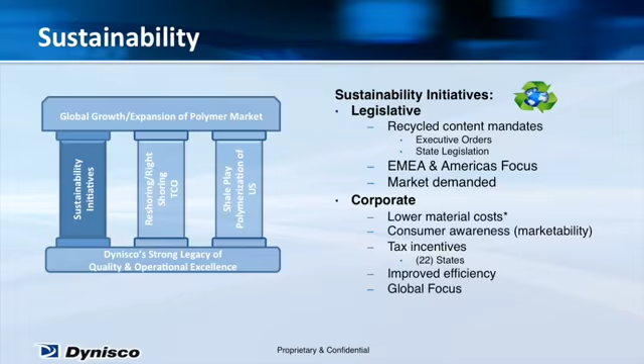The second pillar impacting the increase in polymer production and conversion revolves around what we call today reshoring. Some people call it right shoring. Others call it regional manufacturing and distribution. Here at Dynisco, we have a strategy of build where you sell. By doing that, we minimize risk factors in the total cost of ownership while providing the quickest deliveries to our customers. Simply put, American corporations' love affair with chasing low-cost geography labor has been challenged lately by the actual results it has been receiving from that strategy.

More and more companies are deciding to follow Dynisco's lead and build inside of the geography of demand. For today's discussion, that's North America, and with work returning to a quote-unquote higher labor rate geography in relation to Asia, productivity and quality become paramount. We simply cannot afford to make mistakes, driving the need for better sensing and rheological solutions.

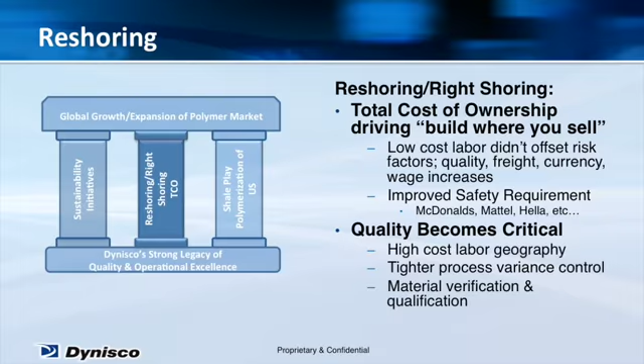The third and the largest impact on polymer production for North America is the shale play. North America is moving from the highest cost producer of resins to the lowest cost producer of resin. Why? Because the two largest cost components of resin production are the feedstock and the energy to convert that feedstock, both of which are converting over to natural gas extracted from the shale fields.

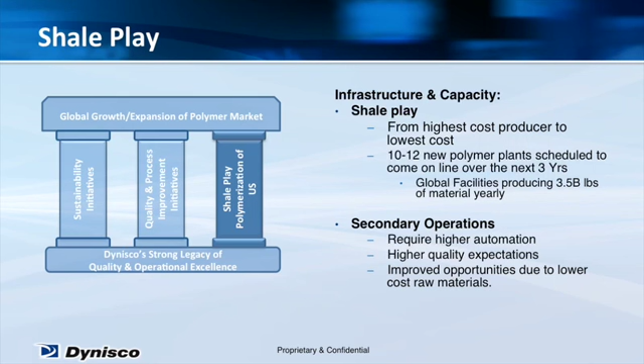The next highest cost component of structure is transportation, so we envision a good portion of the polymer produced will be diverted to local secondary operations, whether it be compounding, injection molding, extrusion, film, or thermoforming. All will require an understanding of the rheological properties of the materials you are working with.

As you look at the graph from the American Chemistry Council, you can see the almost parabolic growth of the plastics market space in North America. What I can tell you today is that it is beginning to happen, although it has shifted 18 months, so we're effectively sitting at the beginning of 2015.

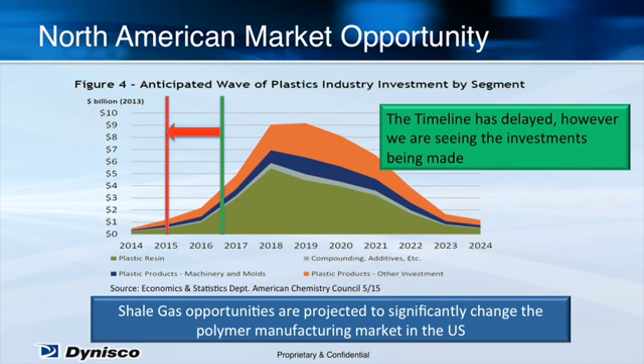This is mainly due to the dramatic oil and gas price drops, leading to a slowdown in capital outlays. The takeaway is that your company will be impacted by the polymerization of the U.S. as the available markets for plastics increase tenfold over the next 3 years.

As we look at the almost $50 billion market opportunity developing over the next 5 years, the need for the associated rheological equipment will scale accordingly.

This includes the verification of inbound materials against specifications such as melt flow index, melt flow rate, and viscosity. As materials are compounded and converted into secondary forms, more testing will be required to ensure master batching and physical end-state properties, driving higher quality levels and limiting liability exposure for the plastics converters.

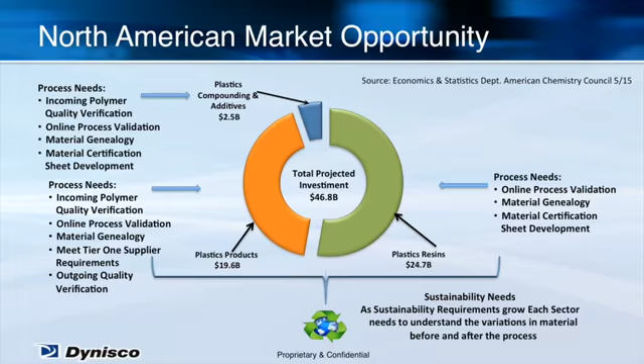As you've seen, the shale play will have a major impact on how polymer is produced in North America. Understand that these same techniques will eventually be utilized in a rinse and repeat manner across the rest of the world. Now that you've heard about the market dynamics, I'm going to pass you off to Bill DeRoges.

He will explain how our portfolio of instruments can provide you a window into your polymer process. Thank you, and I look forward to your questions.

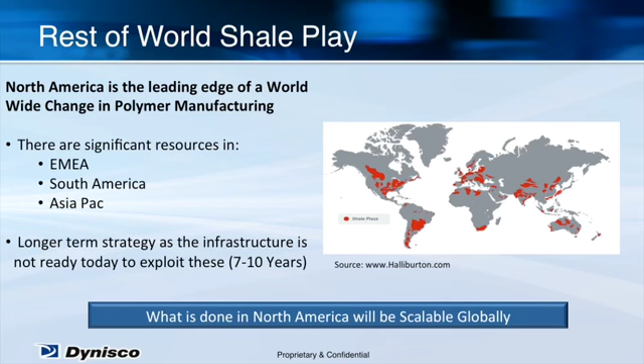Thank you, John. In the next section, we are going to focus on a few important topics: why do we need to test polymers, at what points in the process do we need to test the polymers, what are the benefits in each step, and how do we correlate lab information with production.

The data generated with this instrument is the benchmark for evaluating polymers in the academic world as well as in production environments.

Next in line, we have the LMI Melt Flow Indexer or Plastometer. This is used for quality control and verification of polymers to the ASTM and ISO standards.

Next we have the LME, TUS, and LEC. This is Dynisco's small extrusion compounding line that's used for making small batch developments of polymers.

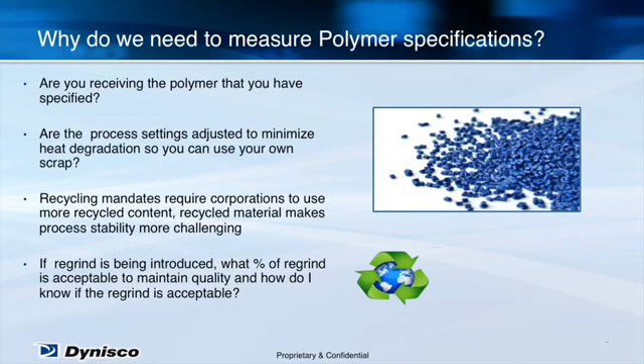If you can perform a simple analysis, you can dial in the proper blend ratio at the time of production to ensure quality and maximize profits per part.

Validating material at receipt in your plant. Many processors receive material in different ways. Some receive bulk material in rail cars or via trucks. Others order material in 25-kilogram bags. Regardless of how you receive the material, you will be mixing it or storing it with material previously received.

An example of this is in a silo. Many processors will fill a silo when it reaches a certain percentage of fill, just like in your car, you never wait for your gas tank to be empty before filling it up. What this means is your new batch of material being received is going to mix with 10 to 25% of material you already have in your system.

If you find after the polymer is being used there are problems, as a processor, you will have a tough time explaining this to the resin distributor that the material was not contaminated in your silo or in your storage bins.

With bags, it's easier to identify the rheological data of the individual bags, but globally, with the bag break systems being employed, you empty dozens of bags at one time or a full pallet of material. If you do this, you'll have the same problem mixing material in your material handling lines or in your day bins. A quick 15-minute test with a melt flow indexer while the material is being prepared to unload will eliminate this issue.

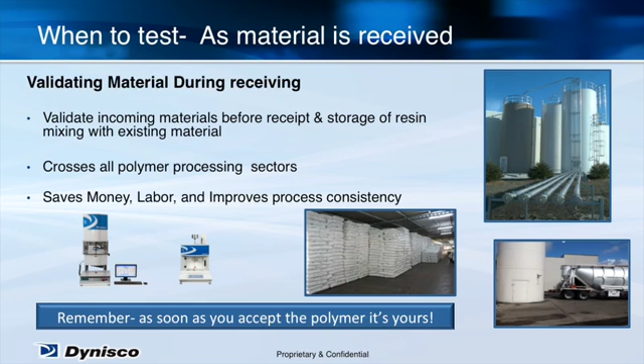When testing, it is also best to take a few samples from the top, bottom, and mid of a truck or a rail car. A few minutes of labor spent here will improve process consistency and save labor trying to identify issues down the line, or worse, reverse engineer failures in the field and the quality costs associated with that.

Much like testing material before you receive it, within your plant you may contaminate lots before molding or extrusion. Within your process, it is important to select and test samples of your material at various stages so you can understand if at any point your process is having an adverse effect on your material.

It also allows you to create a rheological benchmark of custom blended materials. Many times, this is what makes your product unique. By understanding this data, you can measure the properties and maintain process consistency from lot to lot. Measuring this data will also help when designing mold simulation models for your parts.

In this situation, you will have a lot of material being recycled over and over again. It is critical for the customer to understand if the process settings are appropriate so he can maintain this cycle of reusing the polymer. The molder is already granulating the runners, so taking a small sample and running it through a melt flow indexer will give valuable data to help the processor make adjustments or decisions on regrind usage.

Of course, by understanding the regrind being used at a specific time, you'll be able to adjust your blender percentage accordingly from each gaylord being supplied.

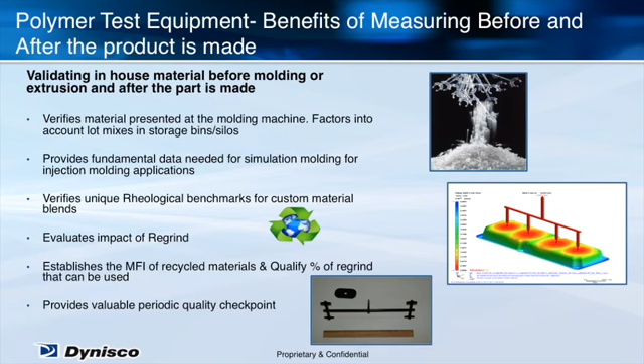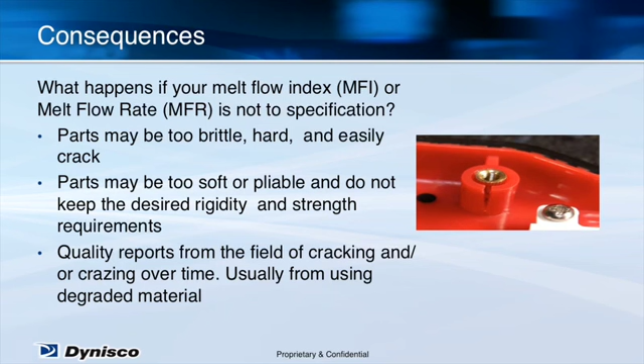You also may hear well after the shipment of quality issues in the field which could lead to warranty claims or lost customers. Take the opportunity to differentiate yourself from other producers of similar products. Understand your material as you're processing it.

Online rheometers are excellent ways to take information used in lab environments and correlate them with production situations. Dynisco's online rheometers provide a continuous, real-time window into the process by measuring up to 15 different pieces of rheological information.

These include melt flow index and ratio, intrinsic, relative, and melt viscosity, shear rate, shear stress, and shear sweep. These instruments reproduce data obtained from a melt flow indexer and a capillary rheometer in the laboratory and continuously monitor them within your production process.

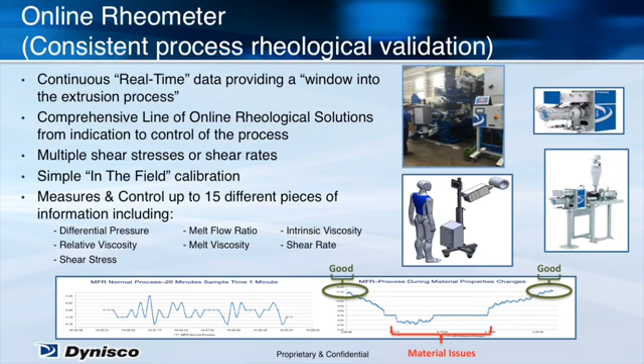As you can see from this slide, Dynisco offers a full range of online rheometers to fit specific applications, from our ViscoIndicator, which indicates only the rheological data that your process has, to our Visco sensor and CMR4s, which do full indication and control of the rheological data. The Rex option provides the process the ability to take pellets, re-extrude them, and then measure the rheological data.

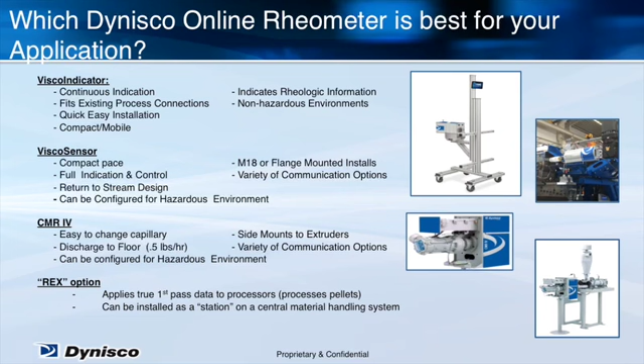The last topic I would like to talk about is how melt flow indexers and online rheometers can assist post-industrial recyclers. Recyclers have the task of procuring post-industrial scrap from processors, size reducing it, and finding customers for the reprocessed material. Polymer analysis in these environments is extremely important so that recyclers can make smart purchases on the incoming material and get the most money per pound when they sell it.

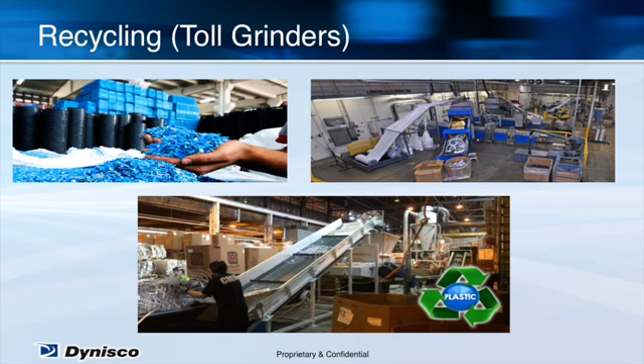In a market where small change in price per pound can make a significant impact to profitability, a simple tool like a melt flow indexer can pay for itself in a matter of weeks. Understanding the rheological properties of the material can contribute to the profitability of a recycling operation.

Typically, a recycler will purchase large batches of material that will allow them to process the same scrap over time, minimizing the changeover and cleaning time between materials. If a recycler understands what they are purchasing in advance, it will allow them to find a buyer for the material after it's recycled, or even make sure the material is not degraded to the point where it's not usable before they purchase it. Many recyclers have bought material and then are burdened with it, unable to find a buyer.

The post-sale benefit lies in the concept of certified material. Some recyclers have moved to the point where they supply their own material data sheets on the material they have reprocessed. By providing material certifications, it significantly improves their ability to sell the material to a wider audience. With a small investment, a recycler will be able to provide the end user with data of what they're buying, giving them additional confidence and making sure they may have made a sound business decision.

Next, you'll hear from John Cazzati, Dynisco's Director of Engineering. He will go into the technical details of Dynisco's online rheometers, especially the new ViscoIndicator, which will help bring online rheology to all processors.

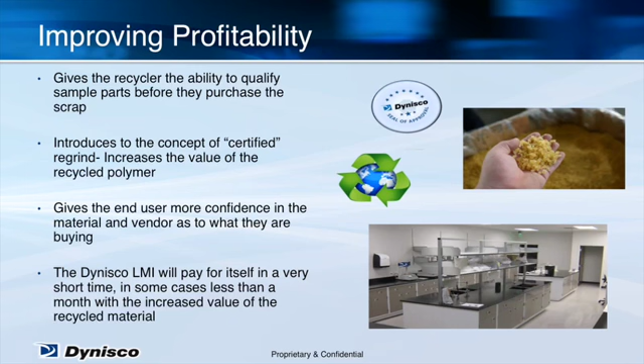My goal is to explain how the ViscoIndicator Online Rheometer duplicates the test conditions of a laboratory melt flow index tester or capillary rheometer. Melt viscosity measurements, such as the melt flow index or MFI, are primary specifications of thermoplastic resins. MFI and melt viscosity are related to polymer molecular properties, so these numbers give some measure of the physical properties of their product as well as the polymer processability.

MFI is a measure of the ease of flow of the melt of a thermoplastic polymer. It is defined as the mass of the polymer in grams extruded in 10 minutes using a specified test method such as ASTM D1238 or ISO 1133.

In the method, polymer is heated to a defined temperature. Then it is driven through a capillary with a defined diameter and length by pressure created by loading a piston with a defined weight. The pressure in psi would be the pounds of the test load divided by the area of the piston in square inches.

The weight of the material driven out of the capillary by that pressure in 10 minutes is that material's melt flow index, or MFI. The melt flow index test is a very simple and effective way to check material viscosity.

Because of the short capillary L over D, this rheometer measures not only viscous losses in the capillary, but also viscoelastic losses in the capillary entrance. This means that the measurement is a function of both the rheometer geometry as well as the polymer viscosity. In other words, the ASTM D1238 standard defines both the apparatus and the polymer test conditions.

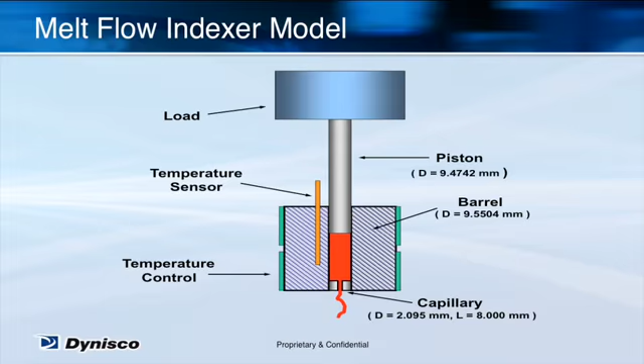Melt flow indexers must be hand-loaded with pellets and weights to create shear conditions, so the test requires a technician and must be done offline.

The ViscoIndicator simulates both the apparatus and test conditions of the MFI test right on an extruder. In the model shown here, a side stream is taken from the extruder, as indicated by the red text in the top center. Process pressure from the extruder forces polymer melt into a metering gear pump.

The pump generates the flow rate and pressure to extrude the polymer through a capillary. The temperature of the steel around the capillary and pump is controlled. A single pressure transducer is located above the capillary to measure driving pressure. The test polymer extrudes to atmosphere, meaning it falls to the floor, just like it would in a melt flow indexer. All material that enters the rheometer flows out as scrap, typically at a rate of half a kilogram per hour.

This rheometer duplicates the internal geometry of the melt flow indexer, so the capillary entrance effects are similar.

In the ASTM mode of operation, the pressure defined by the load and piston specified in the ASTM method is recreated by controlling the gear pump flow rate using data from a pressure transducer. The material flow rate is calculated from the speed of the gear pump. Remember, a gear pump is essentially a positive displacement device that pumps the melt at a constant rate regardless of the resistance to flow.

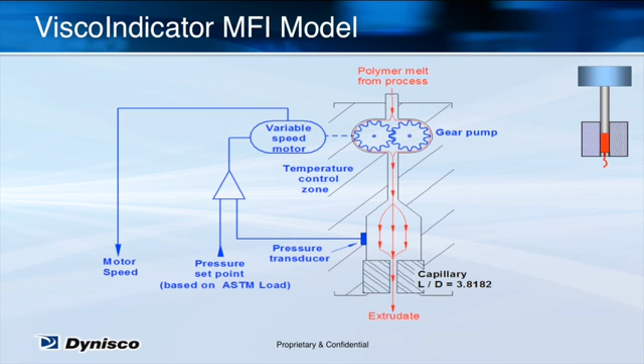This is how a ViscoIndicator duplicates the test result from a melt flow indexer right at the extruder without needing a technician.

The ViscoIndicator has a Windows 10 IoT, or Internet of Things, based rheological software platform that leverages the power of Windows 10. IoT devices running Windows 10 can make use of many other Microsoft services for a better user experience and control.

Windows 10 IoT provides an interface that is familiar to almost everyone. Operators will find this much more intuitive than some of the PLC ladder logic-based interfaces. They can navigate around, set up, and do things that would prove difficult or confusing on other platforms. It also has the advantage of being easy to set up on a Windows-based network.

Since ViscoIndicator is Windows-based, the basic setup is the same as for all other devices running on the network. In addition, ViscoIndicator allows you to collect and store process data on internal or external storage.

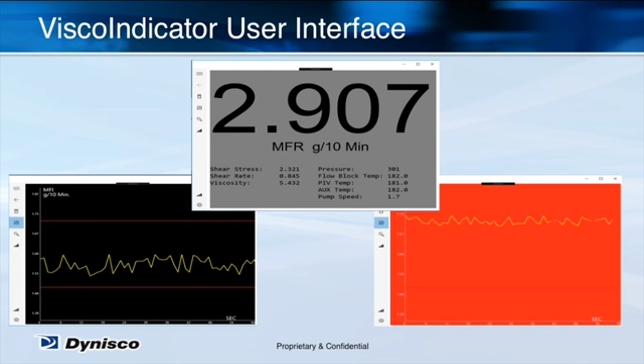As you can see on the slide, the ViscoIndicator has the look and feel that would be familiar to most shop floor personnel. Why is this important? It lowers the training time needed to become effective in measuring the rheological properties of your polymer process. This, along with the ease of connection I'll describe in the next few slides, gets you up and running in a minimal amount of time.

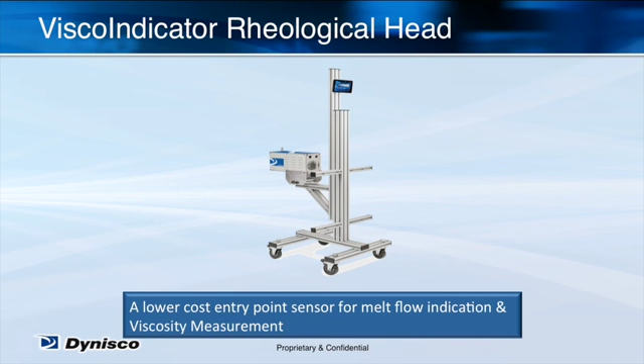The pressure sensor is a vertex, allowing for high accuracy measurement of the low pressures typically created by the test load during a standard melt index test. Standard pressure sensors cannot make this measurement in a half-20 pressure port as well as the vertex does.

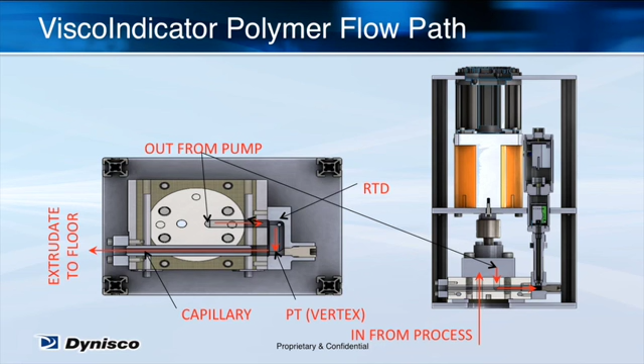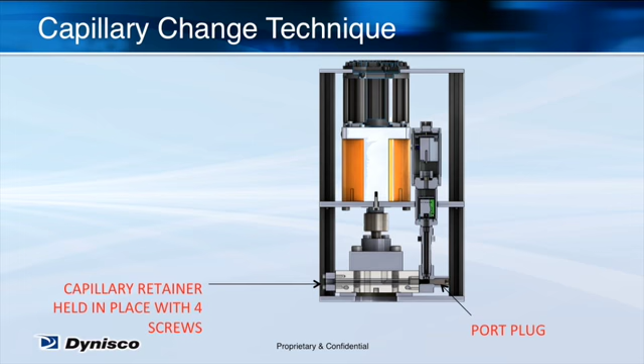Some processors extrude a variety of materials. ViscoIndicator allows for a quick change of capillary. The capillary can be pushed out by removing the port plug and the screws from the capillary retainer. There is no need to remove any other hardware.

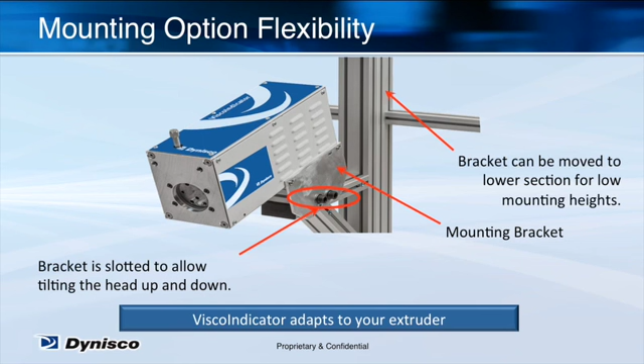ViscoIndicator includes innovative software and hardware to enable viscosity measurement on an extruder at low cost, allowing you to realize a significant return on your investment.